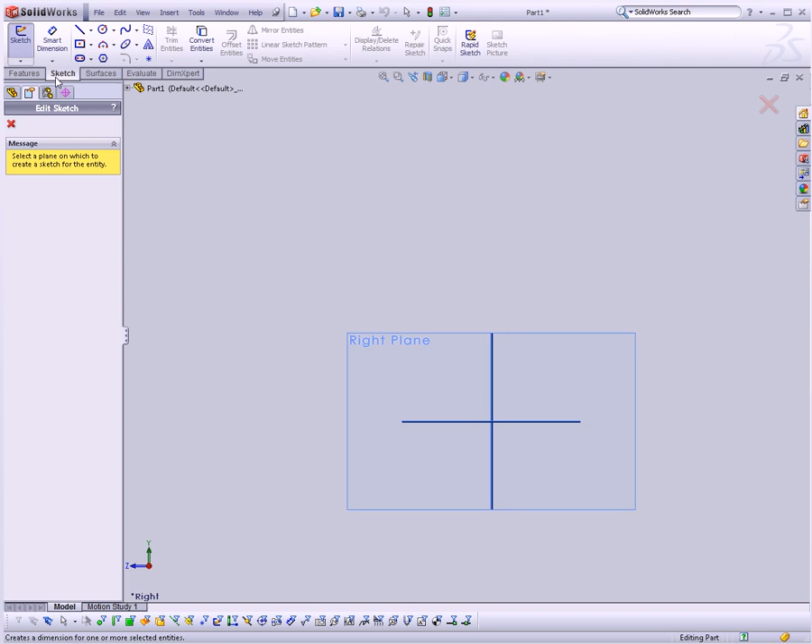So let's start by clicking the Sketch button in the Sketch tab on the tool strip at the top, and then I'm going to click on the right plane in the viewport and choose my Line tool.

Now, to draw a line, all I have to do is click in the viewport, and then I can drag my mouse up. You can see it's telling me that I've gone about 7 inches. It doesn't matter how far I go—I'm going to add my dimensions later. And now it's going to draw another straight line by default.

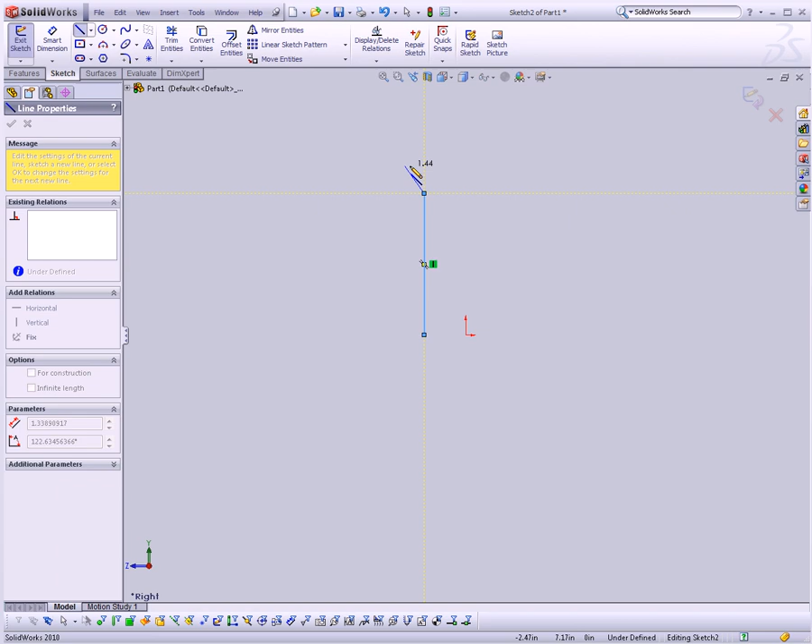Now, I could exit the tool by hitting Escape—that would be the main way—or I could also click up here to exit the tool.

But actually, I want to draw an arc next. To do that, all I have to do is mouse over this point here, and now my tool will switch to an arc. Another way to do that is hit the A key on the keyboard, which toggles back and forth between line mode and arc mode. So I'm just hitting A, and it's toggling back and forth. So there we go—now I can go to arc and draw my little arc.

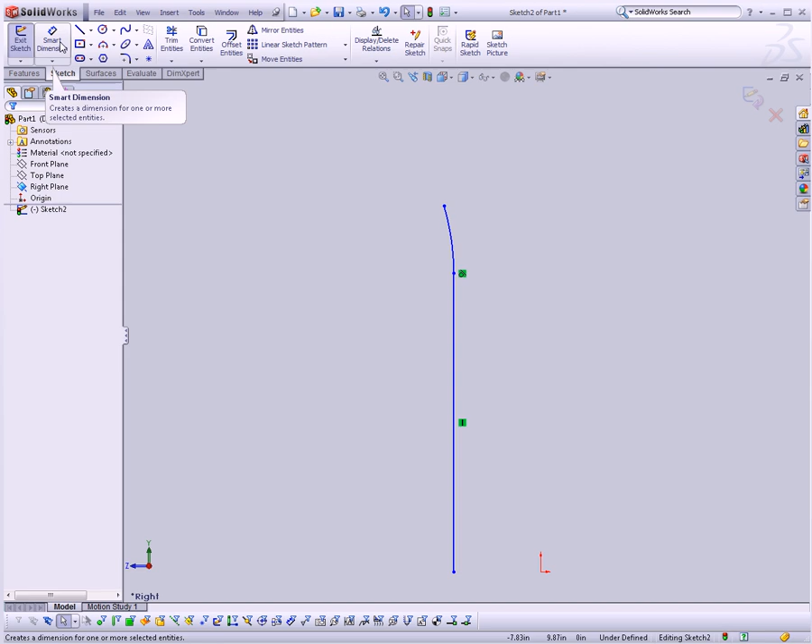Now I'll hit the Escape key because I'm done, and I'm going to use my Dimension tool. I want to make a dimension from the front plane to this line here. I could choose the origin of the sketch, but I prefer to constrain to the planes themselves. So I'm going to constrain to that plane and make that 1.875 inches.

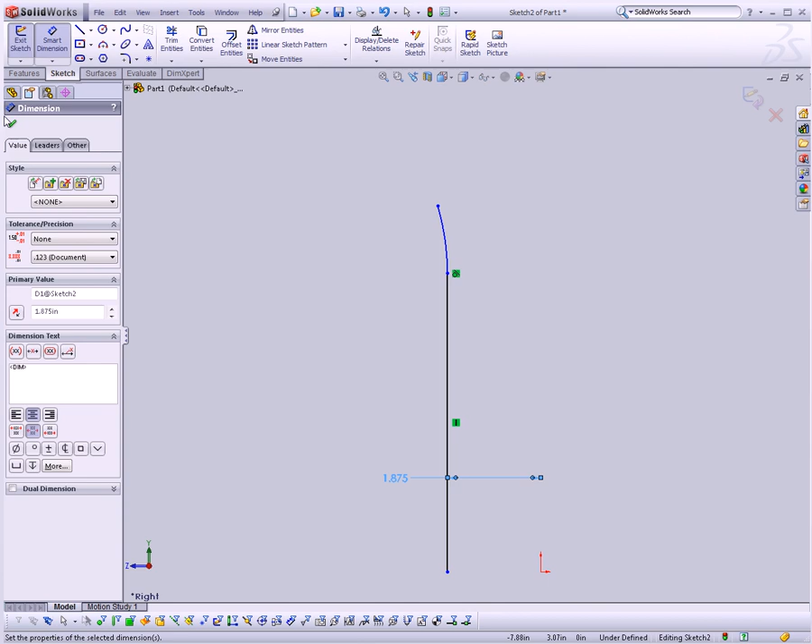Now let's do another one from the front plane to this point, and this one's going to be 1.95 inches. I'm going to make a vertical dimension from the top point to the next one down. We'll make that 1 inch.

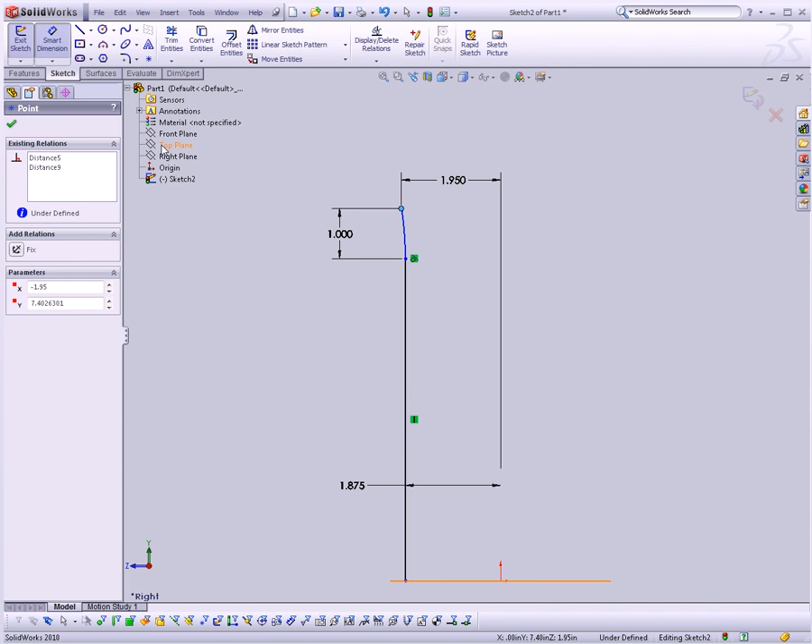And lastly, we want to define the total height of the whole object. So I'm going from this point—I've clicked this point now, so my list is gone. I can't choose the top plane, but actually I can; up here it's just hidden in this little list. If I expand it, I can see there's my item list, so I can choose my top plane and say I want this to be exactly 7 inches tall.

The only thing that's still blue in this sketch is this point down here. It is not automatically constrained, even though we snapped to the top plane there—by default it doesn't automatically constrain it. So I'm going to click on the top plane, hold the Control key and click on this point, and then click on the Coincident button over in the Properties tab. And now our sketch is fully constrained.

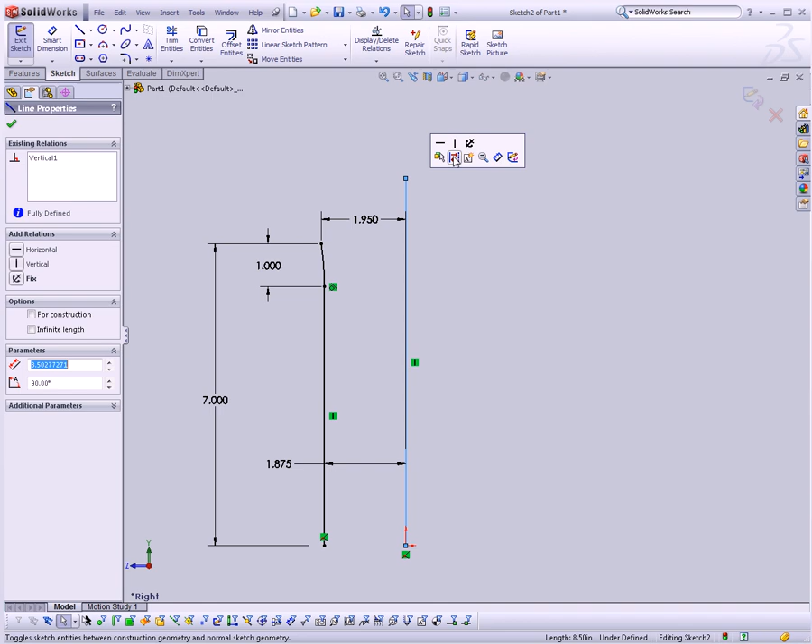One more thing we need to add is in the middle, right here—I'm just going to hit Escape. Now I'll select this item, and I want to set it to be for construction. I can check the box over here in the line properties, or I can click the line once in the viewport and come up to construction geometry in the context menu. That's just going to give this a phantom dashed line, which we'll be using as our center line when we revolve.

So we'll go ahead and jump out of that, and we can go back to our default view. We can do that up here, or, like I said, we can right-click in the viewport and just drag up diagonally.

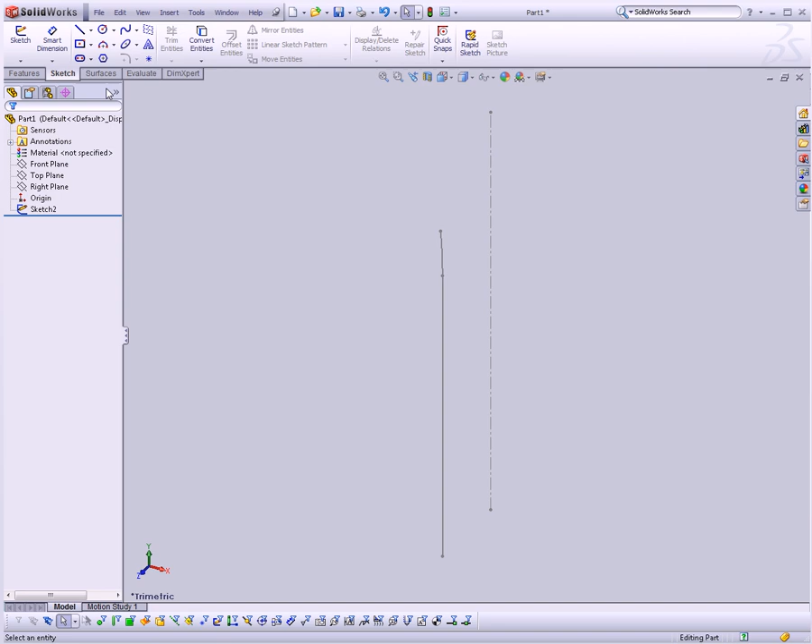Go to Surfaces, Revolved Surface. It's going to ask what we want to revolve. I need to choose my sketch, so I'll just click on the sketch here. And now it's just going to start my revolve. Now, I already have this set up the way that I want it.

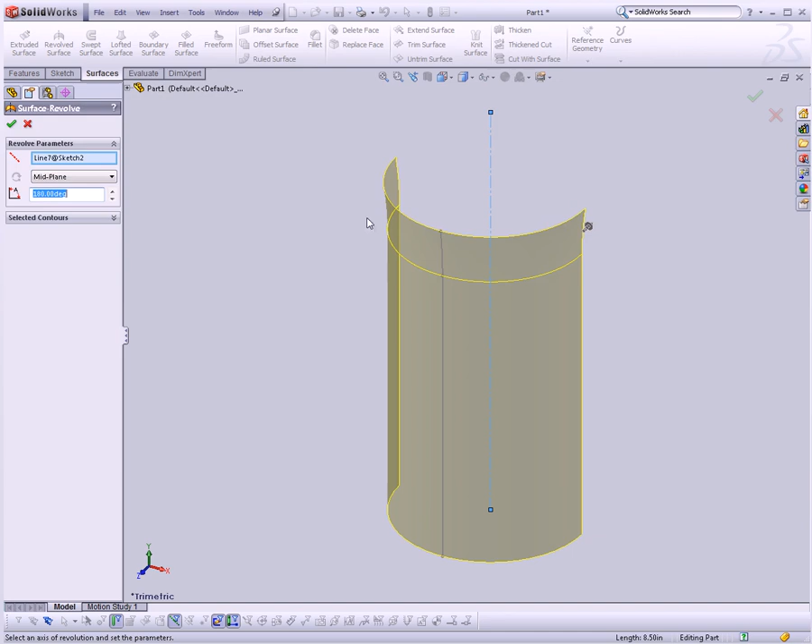By default, it's going to choose the center line of our sketch. We could choose a different line if we wanted to. And this setting here I have set to mid-plane. If it's one direction, it'll go, well, one direction. In this case, I want it to go both directions, and I want the total angle to be 180 degrees. And then I'll click the little checkbox to commit it, and now I have my surface.

Now, as it turns out, there's this black line in the middle, and I'm not crazy about that for reasons that are, well, beyond explanation at this point. I'm not going to explain it now, but basically I have two separate faces on my surface, and I don't like that. The reason I have two separate faces is because in my sketch I have a line and I have an arc, and those two things are separate, and therefore the resulting surface has two separate pieces.

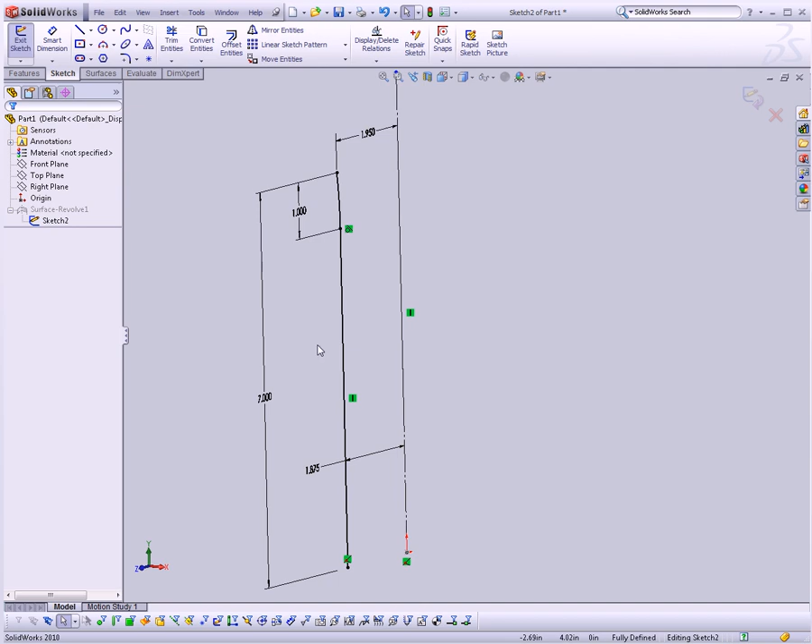I'm going to edit this sketch by left-clicking it and hitting Edit Sketch in the context menu. Then I can just hold the Control key and click both of these items and go up to the Spline button here. And instead of clicking Spline, there's a little arrow to the right of it. I'll click that and go down to Fit Spline. Fit Spline is going to create a spline that very, very closely approximates the line and the arc

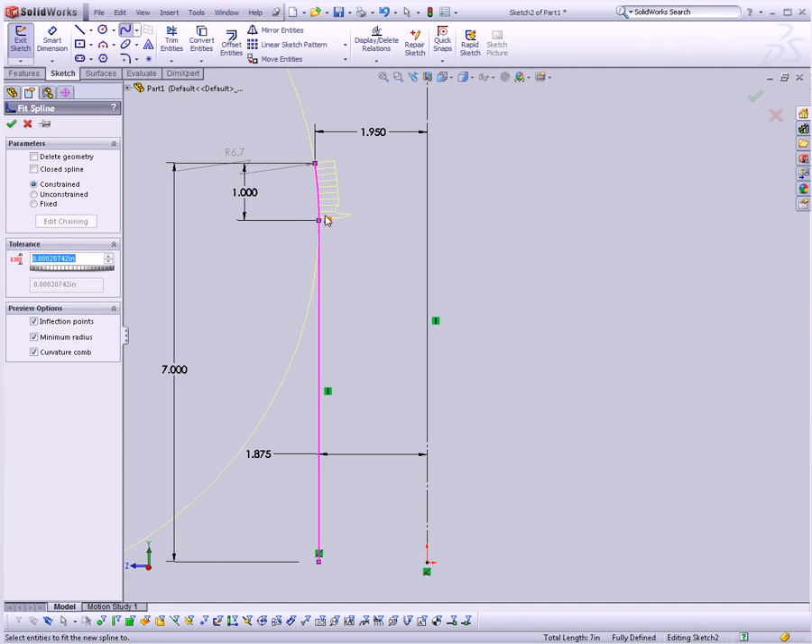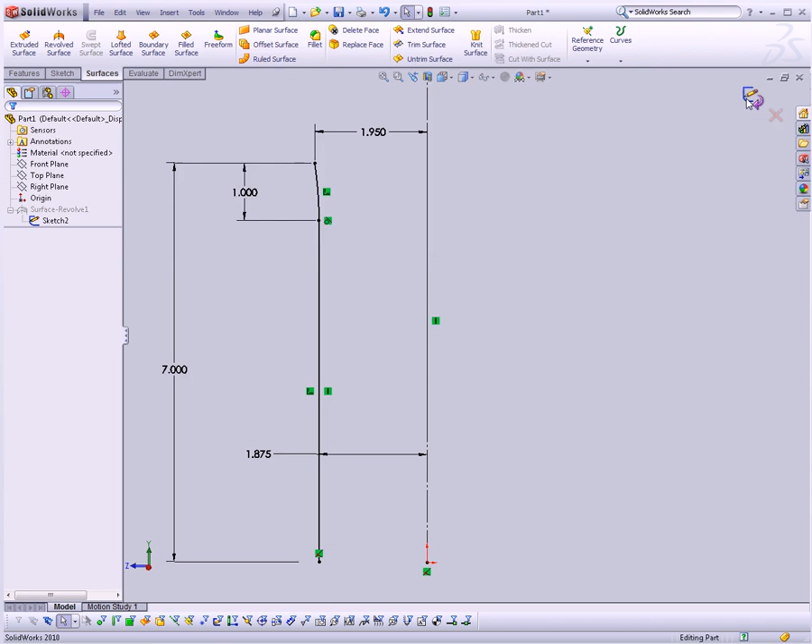in our sketch. So now I can just go ahead and hit the checkbox, and if I click on this curve now, even though I still have my original dimensions, and I can still edit them just like before, change that to 2 inches, it updates the way you would expect. But I have one long continuous spline curve now, and it's a curvature continuous curve. So when I hit my commit button, now my surface is one big face, which is going to be a lot cleaner as we continue to work.

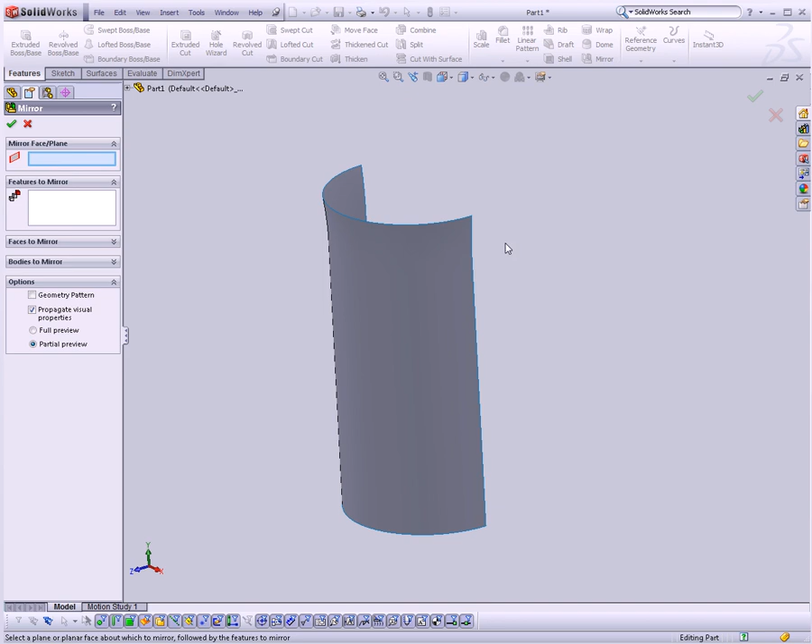So the only other thing we need to do is create the other half of this before we go any further. I did this in halves because, again, I'm not going to explain now why, but I think it's going to be easier for us in the long run. So let's go to the Features tab, go to Mirror, and we need to choose the plane across which we will mirror the surface. So I'll expand our item list here, go down to the front plane, and it says Features to Mirror. I could go ahead and select this Revolve, but I actually want to mirror the body, just as a matter of habit. I generally mirror bodies, not features.

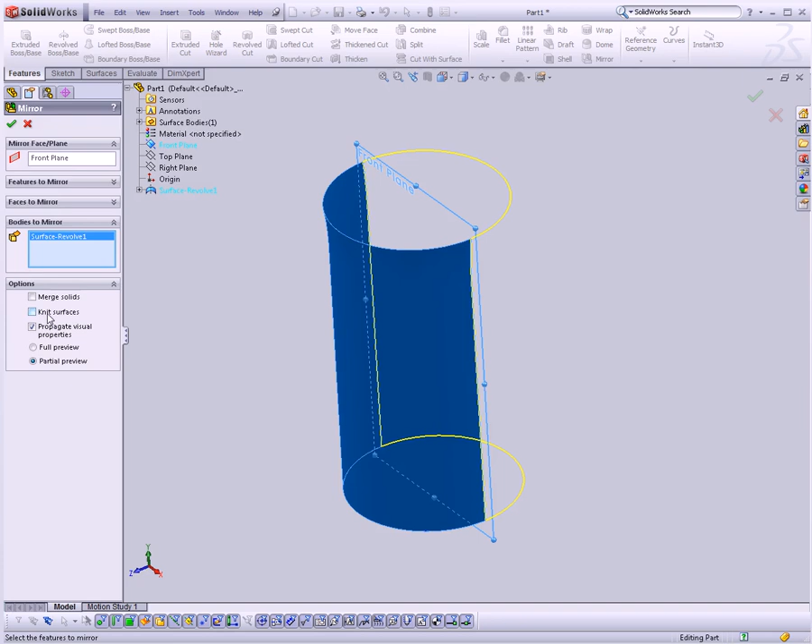So I'll mirror this body across, make sure that Knit Surfaces is not checked, click OK. So now I have two separate surfaces that comprise the entirety of the outside of our eventual glass carafe. And the next thing we're going to do is add the spout, and we'll do that in the next video.